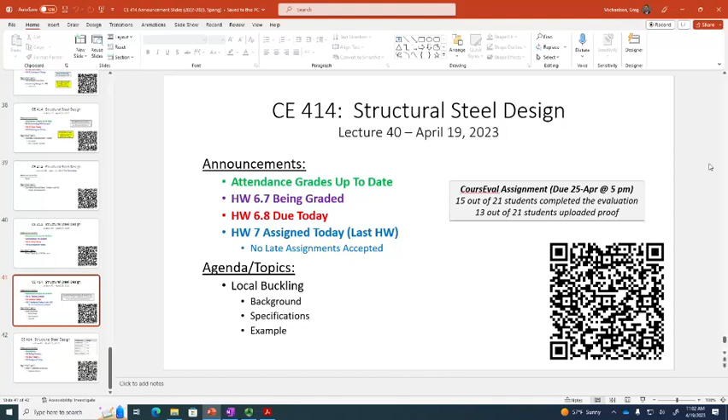Like I said on Monday, this is sort of the end of the class, and the purpose of today's lecture, or this week, is tying up loose ends. The first thing we did on Monday was discuss how to compute shear capacity, because we had been relying on table 3.2, and I said no, y'all need to at least understand how to do it. What we did on that last homework assignment required you to review the specification in more detail than me just regurgitating it to you. Hopefully that went well, I don't think it was too complicated, should have been pretty brief. I'm going to go through a bit more of that today with local buckling.

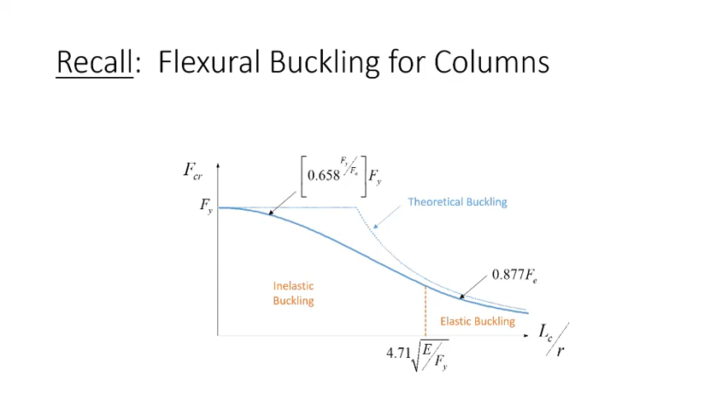But let me set the stage for local buckling. I want everybody to go back to the column curve and the beam curves in your head. With the column curve, one thing to recognize is that there are two zones: an inelastic buckling zone or an elastic buckling zone, and there's a singular limit that defines which zone you're in. With beams, there are three zones: full plastic moment, inelastic LTB, and elastic LTB. For those three zones, there are two anchor points that define what zone you're in.

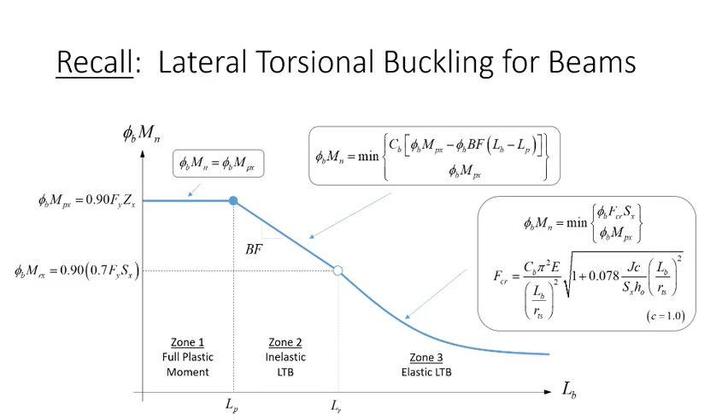Now both of these curves assume a global buckling mode. Today we're going to discuss local buckling. While local buckling and global buckling are different, there are analogies to how they're handled, global versus local. Just to make sure everybody's on the same page, what we're talking about in local buckling is when a given element of a cross-section fails before the whole thing does.

Now I'll level with you that local buckling is not as much of a primary concern in building design as it is in bridge design. Because in bridge design, mostly what we're doing with flexural elements is we're either using really deep rolled beams or we're using plate girders.

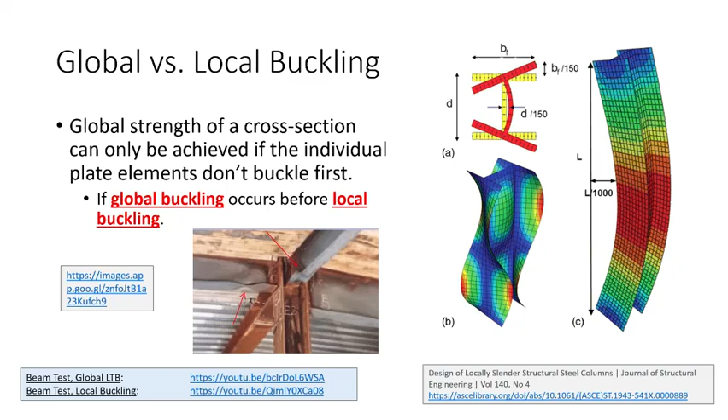Now, this is a topic that's pretty near and dear to my heart. This was actually something that I needed to address for my PhD work. Now, I don't put this up here to just start showing off everything I did for my personal research, but I'm showing this because this actually helps make the case for how the limits are derived.

Okay, so basically what we do when we look at local buckling limits in the specifications is we're trying to compare the width to thickness ratios of the plate elements, and we're trying to compare those against specified limits.

So we actually already got a slight taste of that when we looked at shear, because if you remember on the shear homework, what we were doing is we were taking the width to thickness ratio of the web, that H over TW ratio for the web, and we were comparing it against some limits. Like for the shear homework, we were looking at 2.24 times the square root of E over Fy, and seeing whether that web slenderness was bigger than that or smaller than that. And we were using that to help determine capacity.

It's sort of the same thing with really any local buckling limit. Usually what we do when we try and develop these limits is we look at the width to thickness ratio and we sort of figure out what that ratio needs to be in order for the buckling stress to be equal to the yield stress. And that's where the limits come from.

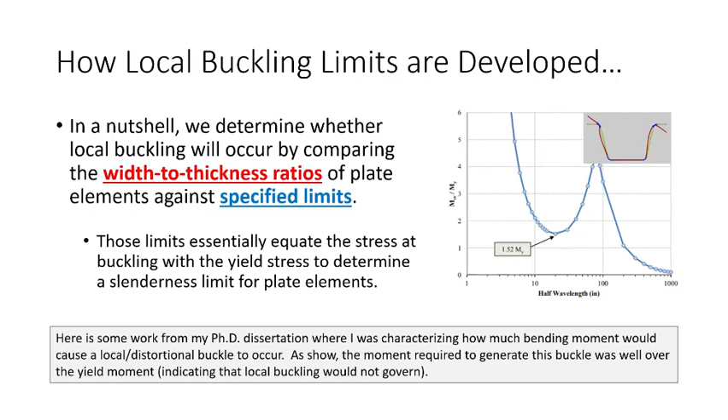Now, what we do in AISC is, if we are going to consider local buckling, we look at the individual plate elements, we look at their slenderness values, and then we compare that against the codified limits to see whether or not it's going to matter, okay?

Now, in the spec, AISC differentiates between two different types of plate elements. We call those stiffened elements and unstiffened elements. Now, the difference between a stiffened element and an unstiffened element is how many supports there are. So for example, if I'm looking at an I-shaped cross-section like this, a stiffened element would be any element that's supported on both sides, like the web of an I-section, the web of a channel, something like that.

An unstiffened element is any outstanding plate element that's supported on one edge. So an unstiffened element would be like this outstanding flange here, the leg of an angle, the stem of a T-shape, anything that's outstanding, okay? And what we do is that for each of these elements, we compute a slenderness being a width to thickness ratio.

For the web, we're interested in the height divided by the thickness. For the flanges, we're interested in the width divided by the thickness, but we're only looking at half the flange, which is why the slenderness limits you look up in the spec will say BF over 2TF.

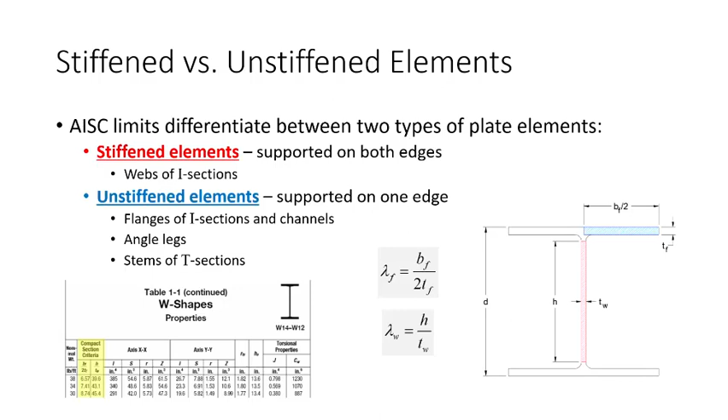Now, for a given W shape, in order to see whether or not local buckling is going to be a problem, we need to classify this section, okay?

Now, for columns, we have 2 classifications. We have whether or not - oh, that's a typo, sorry, I just noticed a typo. Look at me. Let's fix that right now. This is the columns. Ooh, let's redo that. Okay.

So what we need to do is classify our sections according to whether or not local buckling is going to be an issue. Now, if you remember the column curve had 2 regions, it was either zone 1 or zone 2. Well, for local buckling, there are 2 classifications. It's either going to have slender elements or not.

So for columns, we say that if the elements are stocky enough that local buckling isn't going to be an issue, sometimes we'll say that's non-slender, sometimes we'll say that's compact, okay? So basically what we're checking is whether or not the slenderness of the flange or web is less than or equal to some limiting value, which we'll call lambda R. If it's bigger than that, then we'll say it has slender elements.

And I'll show you, if local buckling is an issue, generally how you would compute the capacity. It's really not all that challenging, just maybe a little bit more math.

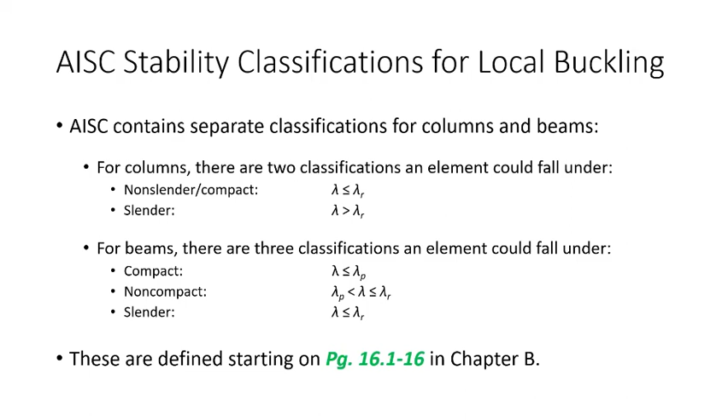Now, in order to classify these elements, you need to know what these limits are. And these limits are found on page 16.1-16. So this is 16.1-16. Everybody should turn to that.

This is a pretty straightforward exercise to classify an element. We'll look at how capacity works here in a bit. But if you notice, 16.1-16 has a really big table on it. The table actually extends across a few different pages, so there's a B41A and a B41B.

B41A is the width to thickness ratios for members subjected to compression. B41B is the width to thickness ratios for members subjected to flexure. So the first table is for columns, the second table is for beams. With me so far?

Now, I want to look at table B41A because I want everybody to pay attention to this. It's a little hard to read, but on the left you see there's a series of cases - there's 9 cases. Case 1, case 2, case 3, case 4. Case 1 through 4, if you look at the very left, it says unstiffened elements. So unstiffened elements are any element that's outstanding by itself, whereas stiffened elements are ones that are supported on both sides.

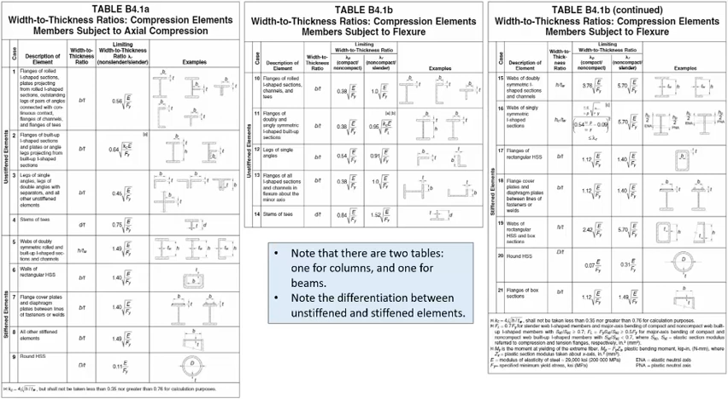So if we're looking at a W shape, what we're looking at is case 1. Case 1 is looking at the flanges of rolled I sections, and our limit is 0.56 square root of E over Fy. Whereas for stiffened elements, we're looking at H over TW for case 5, and it's 1.49 square root of E over Fy. So all we have to do is compute these limits, compare them against our slenderness criteria for our columns and beams, and see where the shapes shake out.

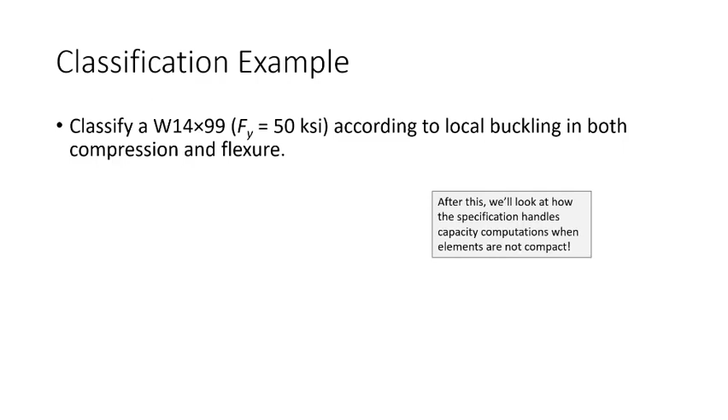So what we're going to do, just to make sure how this works, is we're going to classify a W14 by 99 according to local buckling in both compression and flexure. I'm going to show you with this section what happens, how you handle the capacity if you start failing one of these limits. If you fail one of these limits, if you have an element that's slender or non-compact, it does not mean that the column explodes when you put a feather on it. What it means is that the capacity has to be reduced to account for the fact that local buckling might occur, and you just need to do some more math. It's really not all that more challenging, and you'll see that here in a bit.

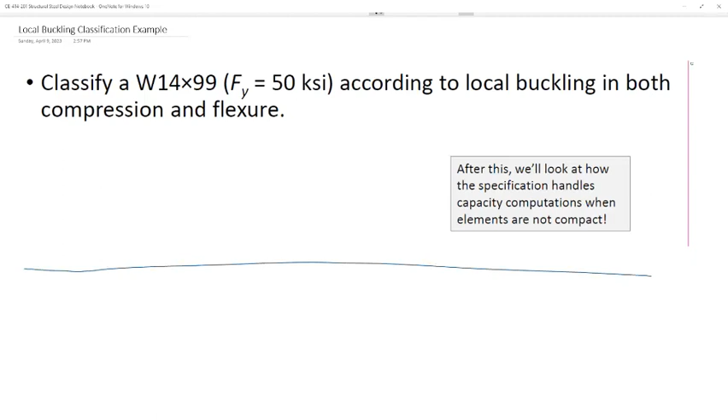All right, so once this decides to load, there we go. So what we're going to do is we're going to classify a W14 by 99 with 50 KSI steel according to local buckling. Now, for a W14 by 99, we need the lambda F and the lambda W, which, just to make sure this is clear, this is BF over 2TF, and this is H over TW. So let's look these up.

So for a W14 by 99, what is the flange slenderness and what is the web slenderness? 9.34 for the flange, and what about the lambda W? 23.5. And just to make sure everybody is clear, what are the units for these numbers? There are none. These are unitless. Slenderness properties are unitless.

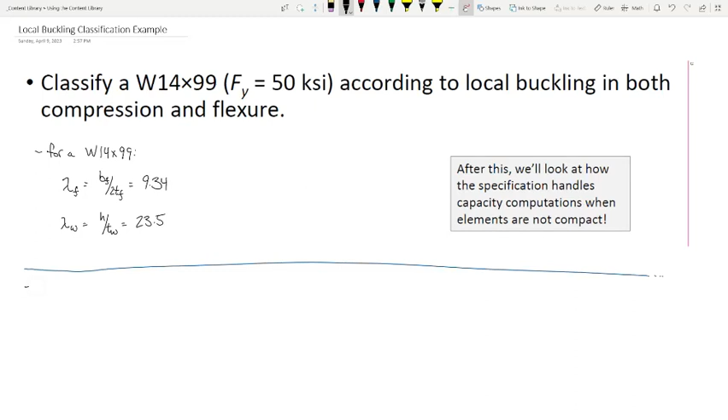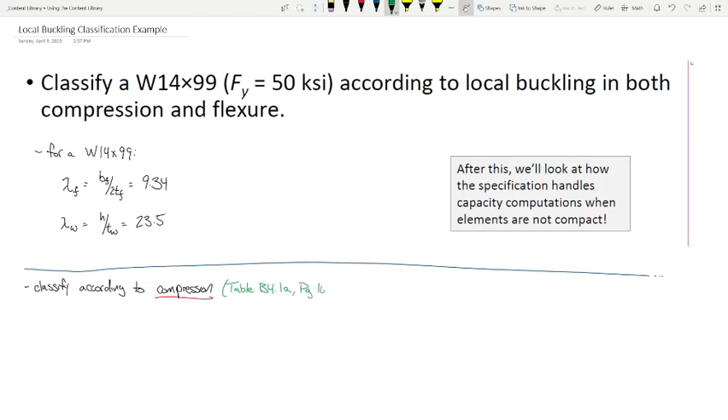All right, so the first thing we're going to do is classify this element according to compression. In order to classify according to compression, we're going to use table B41A on page 16.1-16. Let's see what cases we need to look at. So let's everybody turn to B41A. I'm on 16.1-16 or 16.1-17. And what we're going to need to do is classify both the flange and the web. So let's classify the flange.

So let's make sure everybody's paying attention. Is a flange an unstiffened element or a stiffened element? Unstiffened, okay? So if we look at our unstiffened elements, which case is going to apply to a W section? Is it going to be case 1? Yeah, it's case 1, right?

So case 1 tells us our limiting value. First off, we're going to say BF over 2TF is 9.34, and our lambda R, in this case I'm going to call it lambda R sub F for a flange, and how do we compute that? It is what? If we're looking at case 1, what is that? There we go. And that format, like a number times the square root of E over Fy, should be familiar, because remember for columns it was 4.71. So it's .56 square root of E over Fy, so 0.56.

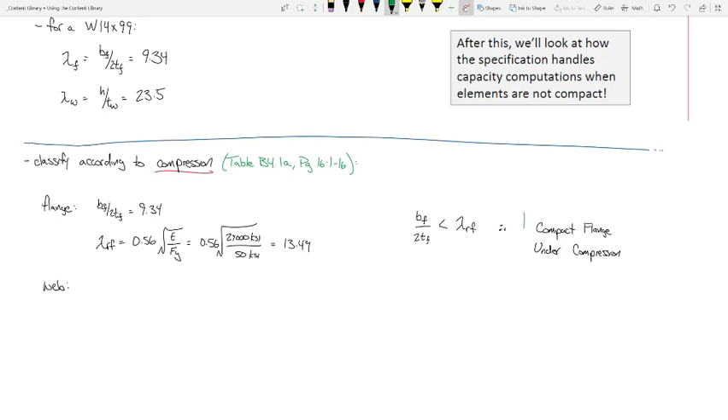So that is one of our answers. This is a compact flange under compression. All right, what about the web?

Okay, so for the web, we're going to say H over TW, which was 23.5. And what about lambda sub RW? So what case are we going to be going off of in table B41A? Is the web an unstiffened element, or is it a stiffened element? Stiffened, okay? And so what case are we going to use? Case 5, right? Case 5 is the web of a doubly symmetric, rolled, and built up I shape. So that's exactly what we're looking at here.

And what is our lambda R going to be for the web? It's going to be what? 1.49 times the square root of E over Fy.

And what is that if I have 1.49 square root of E over Fy? 35.9. Do I have a second?

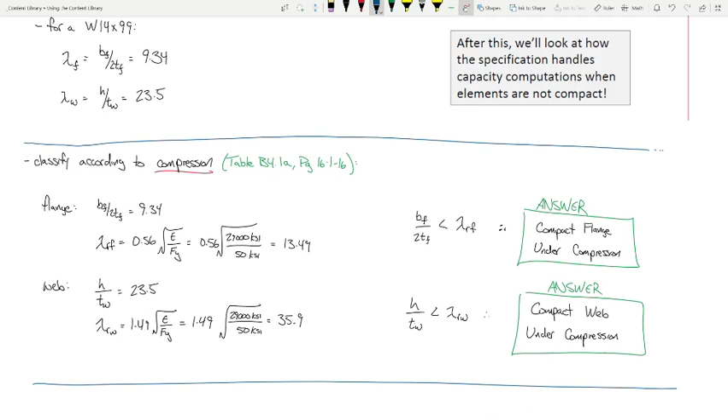Just so you're aware, what this means is that if you remember earlier in the semester when we looked at columns, we didn't talk about any of this. Well, all that math that we did earlier in the semester assumes that the flanges and webs are compact. For a W14 by 99, that assumption is in fact true, that they are compact. What I'm going to show you is how that works out in the specification here in a bit. So just bear with me.

So now what we're gonna do is we're gonna classify according to flexure. So now we're gonna do this again, but we got a little bit more going on.

So for the flange, again, we've got our BF over 2TF is 9.34. But now what's going on with bending? If you turn the page and go to the bending chapter, now we got a little bit more going on.

So first off, when you turn the page, there's two tables. The table on the left is for unstiffened elements, the table on the right is for stiffened elements. And what happens is we have two limits, a lambda P and a lambda R. So what I'm going to do is compute both of them, and you'll see where this shakes out. We'll call it lambda PF, lambda RF.

And what we have is 0.38 square root of E over Fy, and you have 1.0 square root of E over Fy. That's in that first case. Because remember, with beams, we have three zones: compact, non-compact, and slender. Now, what happens here? So what happens when we compute lambda PF?

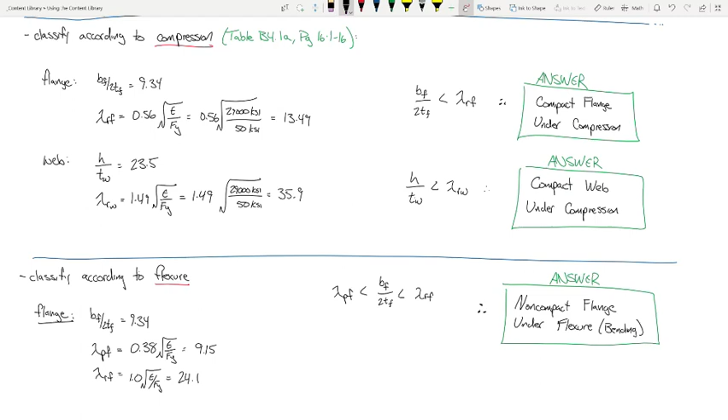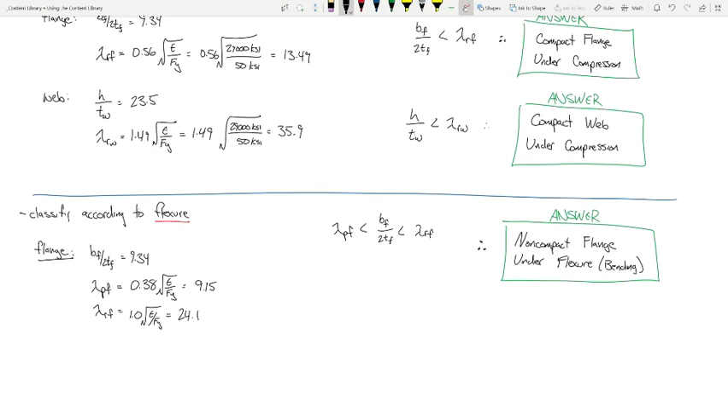That's supposed to be RF, right? And RF, yes it is. You're right, that's like two today. I know, but here's the thing. It's like the meal points, like I'm near the end of the semester. I'm only allowed 7 mistakes a semester. I've been doing pretty good. I need to start racking them up. Oh, okay, I use them all. So these are on purpose, so they don't carry over. Of course they are, you know. They don't carry over. So they don't carry over to the next semester. No, they don't. I don't have rollover mistakes. I love my job. All right.

So for the web, we do something similar. We have H over TW equals, what was H over TW? 23.5. And then we're going to have a lambda PW and a lambda RW. So in this case, we're going to look at the table to the right. And what do we have for the table to the right, our lambda PW and RW? So there's square root of E over Fy, but the numbers are different.

So what do we got for lambda PW? What's the number? 3.76. And what about lambda RW? 5.7. Okay.

All right, I'll go ahead and shut these out for you. So you get 90.55 and you get 137.3. So how would you classify the web in this case? Compact, this is a compact web. Okay, and so this is what we mean by classification, so H over TW is less than lambda PW.

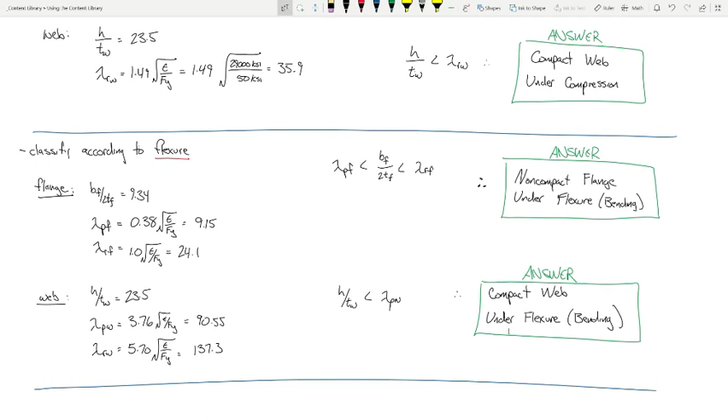All right, I want to show you something. Now I want you to follow along with me in the specification, because now I want to go back to some sections in the spec and investigate them a little more thoroughly. Let's start off with Chapter E. I want everybody to go to Chapter E. So we're on 16.1-33, and then specifically we'll be looking at the next page, this user's note.

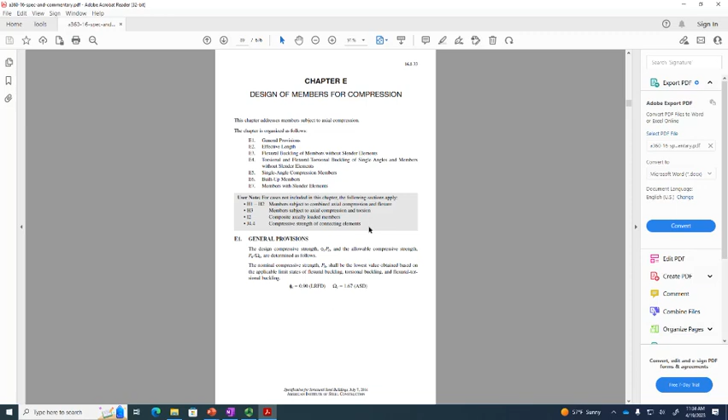Well, let's go to Chapter E. Okay, so this is Chapter E. This is the chapter that tells you how to design members for compression. This is the column chapter, okay? So if you notice, the general provisions tell you, okay, here's the phi value. We know phi is 0.9.

But what I'm interested in is now taking a look at this user's note. Okay, so this is something we really never paid attention to so far, but I think this is probably one of the coolest, or the most useful introductions in the most recent editions of the manual. So this is the user note for Chapter E. What it does is it helps you determine what section of the specification you should be using.

So for example, we have a cross section, okay? Let's look at the different types of cross sections. We have an I shape, we have I shapes that are singly symmetric, we have channels, we have tubes, etc. What it's telling you is, okay, if we have compact elements, here are the sections in the manual we need to address. So if we're looking at this, we need to look at section E3, we need to look at section E4, and we need to look at these limit states. We didn't look at torsional buckling, but torsional buckling never really governs for W shapes, we just didn't really worry about it.

But if you have slender elements, it doesn't mean the column explodes. It just means you need to look up, or compute the capacity according to a different section in the manual. So let's just say, the W14 by 99, what was it? It had compact flanges and webs according to compression. So we're here, we go to section E3.

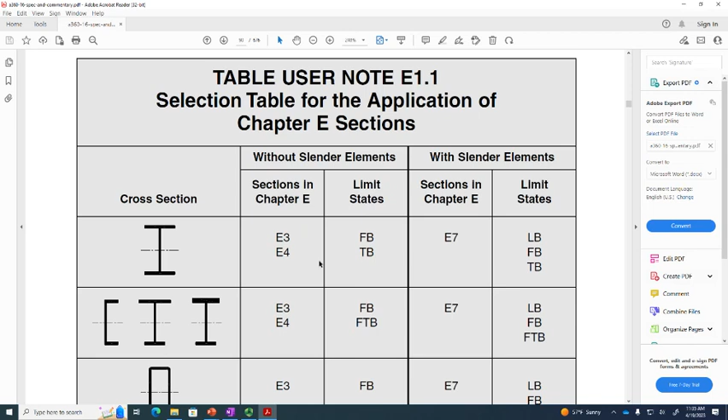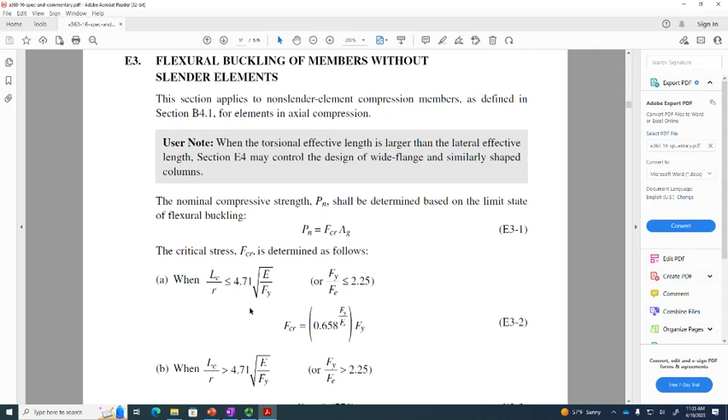What does section E3 look like? Well, let's go to section E3. So here's section E3, and here's the capacity. Section E3, flexural buckling of members without slender elements, and here's the math. Does that look familiar? Those are the column curves, right? What this is saying is that we do not need to consider local buckling because we have compact flanges and webs, so we just compute the capacity assuming global buckling occurs, which is the same column curves we've been using this whole time. Okay? Make sense? All right, let's continue flipping through the manual.

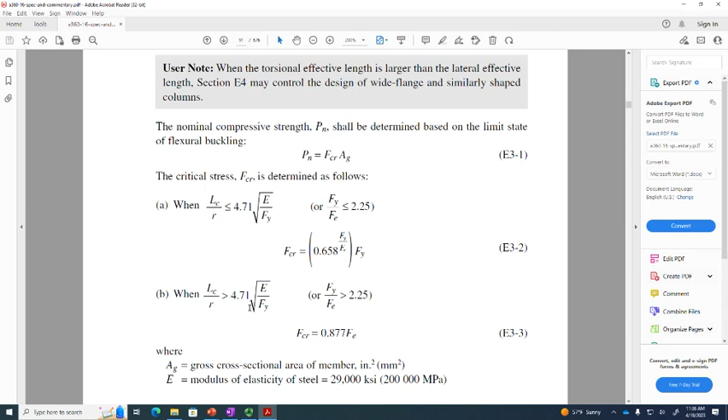Let's go to 16.1-45, and let's look at the beam chapters. This is Chapter F.

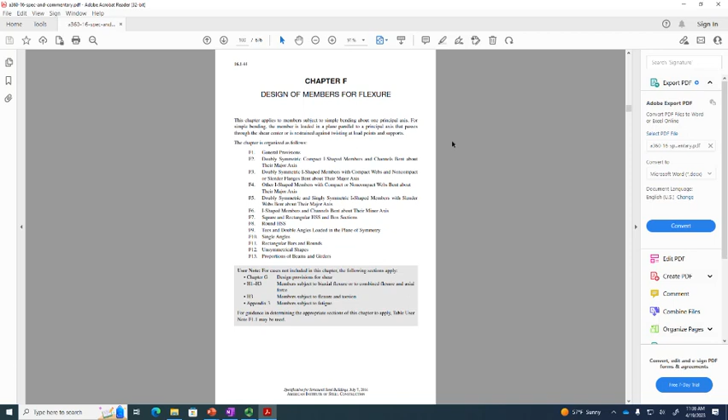Okay, so we're in design of members for flexure, and just like the previous chapter, we've got a nice little user's note that looks like this. So we got different sections in the manual.

Now look at this, this chapter is laid out a little differently. We've got the different cross sections that we're looking at, but then look at the flange slenderness, the web slenderness. So this problem that we just did, what did we have? We had a W14 by 99. The web was compact. What was the flange?

Non-compact, right? Is that what we got? Okay, so let's look at section F3. So F3, we have a doubly symmetric I-shape. We have a non-compact flange. We need to be using section F3. And what it tells us, what are the limit states that we need to consider? Well, we need to consider lateral torsional buckling, which is what we did before. Then we need to consider FLB. What is FLB? It stands for local buckling of the flange, or flange local buckling. Why are we considering the flange? Because the flange is the one that's flimsy, right?

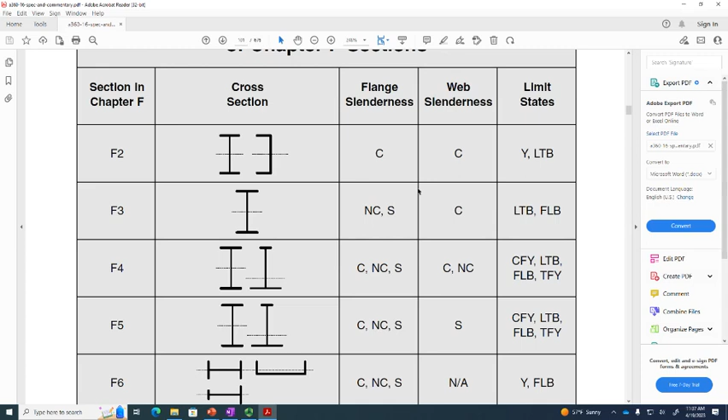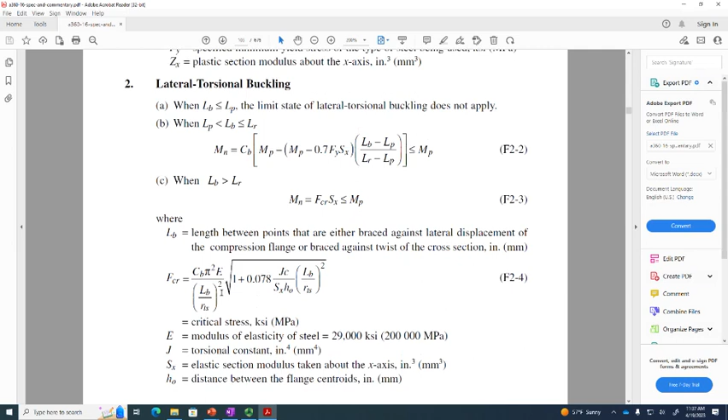So let's turn to section F3, see what it looks like. Okay, so here's section F2. Section F2 contains all the stuff we've been using before, right? Here's all the FCR stuff, the zone 2 curve, all that stuff we looked at before.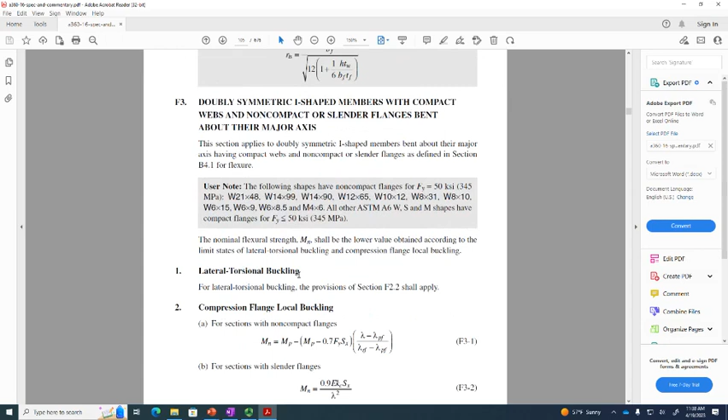And here's section F3, 16.1-49. Okay, what do we have here? Doubly symmetric I-shaped members with compact webs and non-compact or slender flanges. It's exactly what we're looking at on this problem. Look at this user note: the following shapes have non-compact flanges for FY 50 KSI. Look at what we got. Oh, look at that, look at the W14 by 99. That's what we just looked at. It's like I just picked it out of the clear blue sky. I just got lucky. I'm good like that, right?

So how do we compute the capacity? How do we compute VMN? The nominal flexural strength shall be the lower value obtained according to the limit states of LTB and compression flange local buckling. So what do we do? We take this W14 by 99 and we compute two VMNs. The first VMN is everything we did for the past couple weeks. So get a VBF, get a VMP, go to the ZX charts, all that, and get the VMN according to that section of the manual.

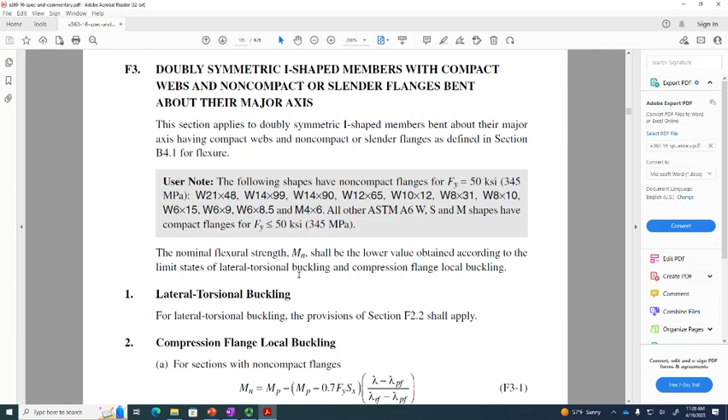Then the next thing that we do is we compute the capacity according to this. So we have a non-compact flange, so how do we compute the capacity? We use this equation right here. So what do we need in order to do this? We need lambda PF and RF. Do we have those values? It's like we just computed them.

What about over here, 0.7 FY SX? Can we look up SX for W14 by 99? Of course we can. What about MP? How do we compute MP? Don't remember how to do that? How do you compute MP? You take Fy and you multiply it by what?

We're going to be celebrating this next week. So how do you compute MP? Fy times what? This was a few weeks ago. ZX, right? Yeah, that might show up on the celebration. Just a heads up, all that ZX stuff, that might show up.

So what we would do is we would compute our capacity according to the previous method, and then we can compute our capacity according to this expression and just take the minimum of the two. Is that really all that difficult? Pretty straightforward, right? So I'll tell you, if you do that for this problem, you get a VMN of about 645.8 foot kips. You ought to try it out just to see how well it works, but this isn't really all that challenging.

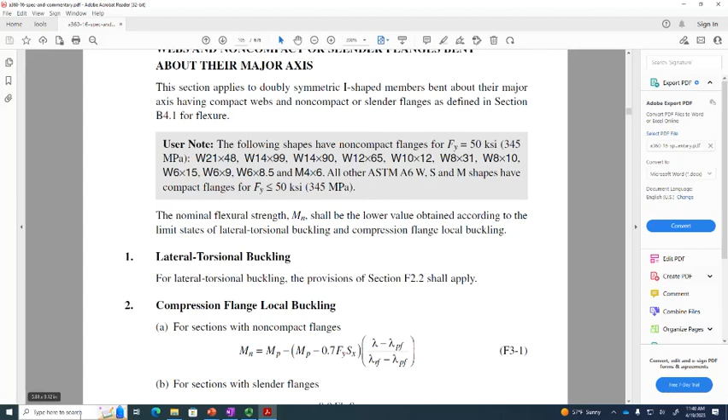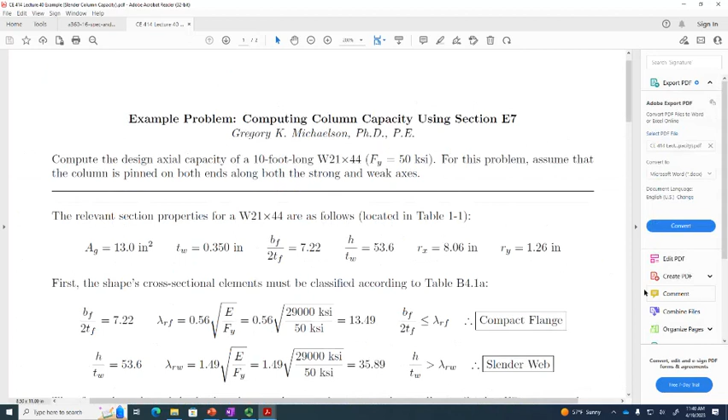The other thing I gave you was, in your online, this is on Blackboard, I prepared this. This is a column capacity. I'm not going to go through it in super significant detail, but I said let's compute the capacity of a, or I'll make it full screen.

So let's compute the capacity of a W21 by 44, assuming it's 10 foot long and that it's pinned on both ends. Let's compute the column capacity of that, the capacity in compression.

What I did essentially is I looked up all the necessary properties for a column, and then I did that classification exercise, and I found I had a compact flange, but I have a slender web. So this column would experience local buckling about the web. We can't use directly the same stuff that we did for columns. We have to adjust it a little bit, and we do this according to section E7.

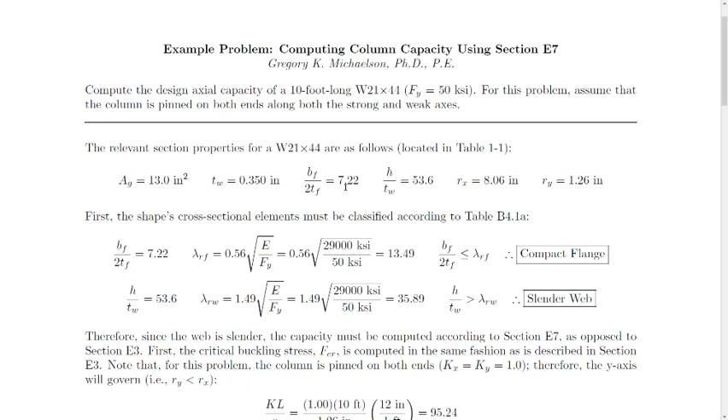I will go through this in a little detail. Largely what you end up doing is you use a lot of the same equations that you did before, but you end up tweaking them a little bit. The first thing you do is you compute your KL over R, your FE, you figure out what FCR expression you got, and you do that. But then what you ultimately end up doing after that is you reduce the area.

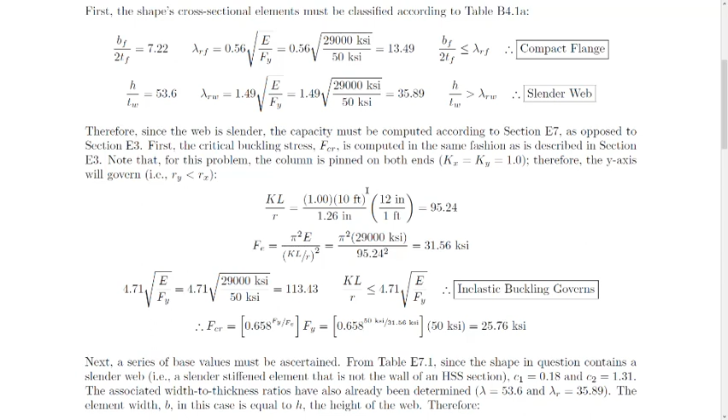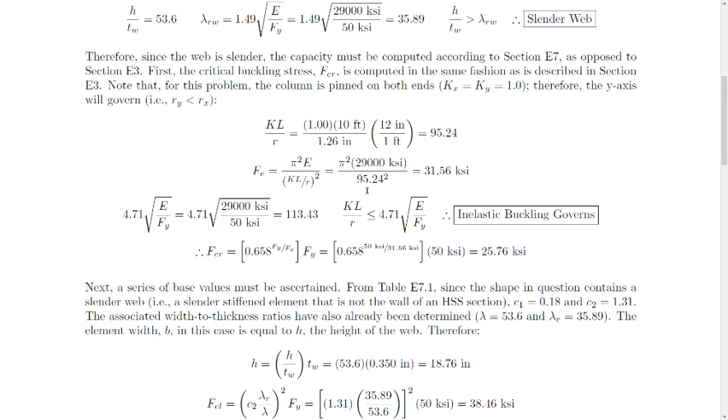So the idea is that you have an I shape, right? And if you're computing the capacity, you basically say some of that web is ineffective because some of that web has buckled. So we reduce the area based on how much of the web is buckled, and that's our capacity. I'm not including those tables in the manual here, because the idea is that you could take this, open up your manual, and sort of follow along the manual where this is going. But basically what you're doing is you're computing some adjusted buckling stresses and ultimately trying to reduce the area. So you basically compute an effective area, which is cutting a little bit of the area out to account for the fact that some of the web is buckled.

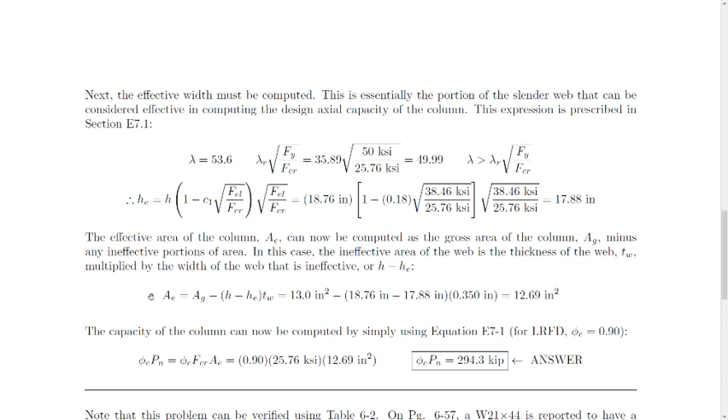When it's all said and done, you get a capacity of 294.3 kips. You can actually verify that if you look up the capacity. You'll find that if you have a column length of 10 feet, look up the capacity, you get the same capacity as if you computed it.

So really the point of this week, I guess I kind of fibbed a little bit because I said this week we're tying up loose ends. Tying up loose ends means covering shear and covering local buckling. But I also kind of want to somewhat prepare you for design outside of what we learned directly in this class, because there's going to be problems you deal with in the real world where, okay, in Dr. Mike's class we learned how to just do LTB, but we didn't learn how to do it if the flanges were non-compact. Well, how do we do it? It's not hard, just follow the manual, read it, go through the specifications.

I mean, the specifications are designed to help you out. They may seem daunting, but there's been a lot of care taken to ensure that they're well organized, they're easy to follow, the math is pretty straightforward. Another thing that's also been done pretty well, at least with American design specifications, is that if you open up the bridge specification and open up this, which is the building specification, and look at the models and equations for plate girders and the same ones here, they're all pretty much the same. So there's nothing that, for the most part, you'll find in the bridge spec that's grossly different than what's in the building spec.

There are some tweaks. So like the Cb equation that you use in the bridge spec is a little different than the one you use in the building spec, and a couple other things, but by and large it's all pretty much the same. Because the idea is that as an engineer, you don't need to be juggling with that while you're designing different components. Ultimately, the steel beam doesn't really care what it's going to be used for. It should behave the same way it's going to behave.